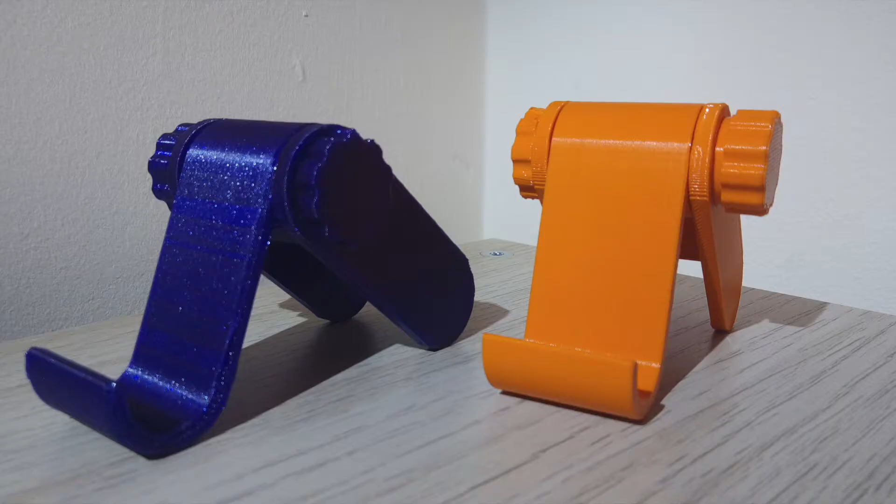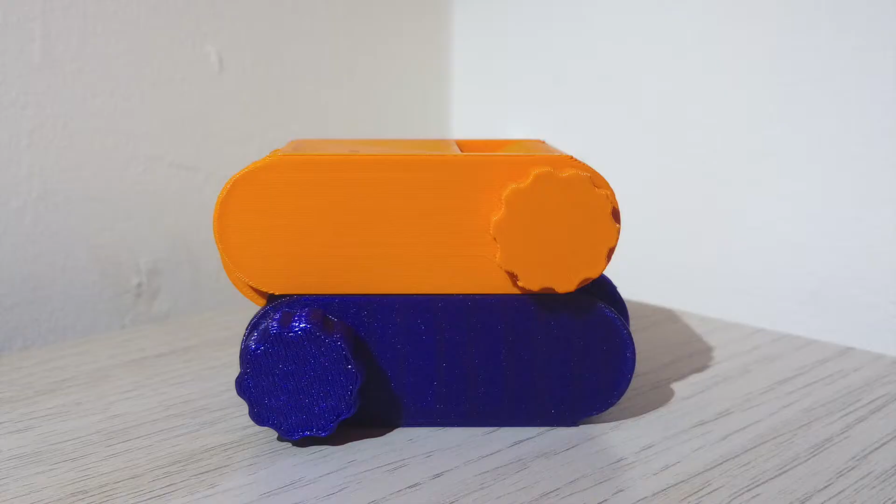So it just so happens that sitting right next to me while I was brainstorming was this. You may have seen one of these before in some previous videos, but it's a standard adjustable collapsible phone stand. When I got this print originally, it came with a tablet stand as well, and it's almost exactly the same thing, just stretched out.

Therefore, if I take the tablet stand and make a few modifications, I could have a stand to keep in the bedroom in general, and a separate way to attach that stand to the front of the drawers, right here. So, with that plan in mind, I jumped into Tinkercad once again.

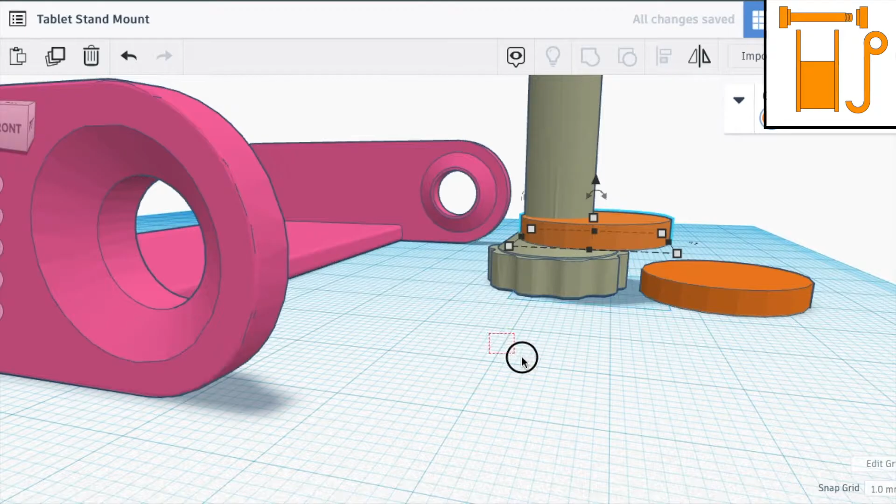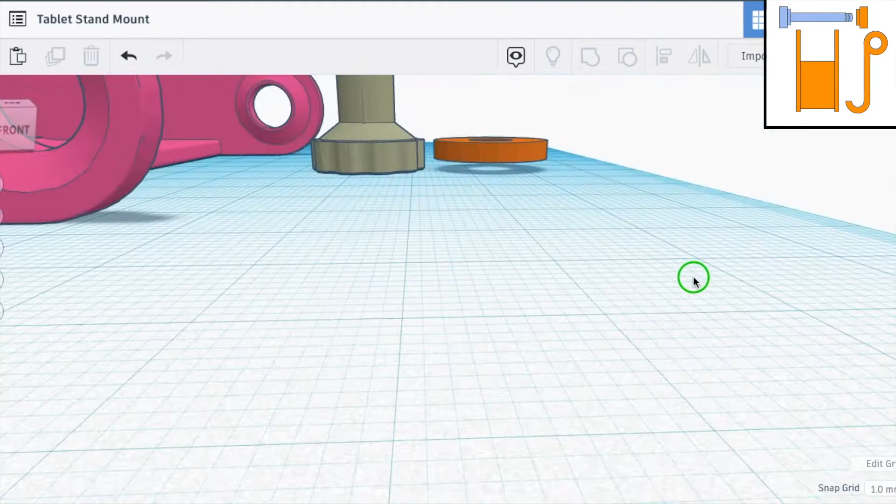These device holders already have things sticking out on both sides, the bolt and nut that make up the pivot of the device. I knew that the bolt would provide the most support for the whole fixture if it was the one holding most of the weight, so I wanted to modify the head of the bolt rather than modifying the nut itself. So I thinned the head of the bolt to hopefully slide into some other mechanism.

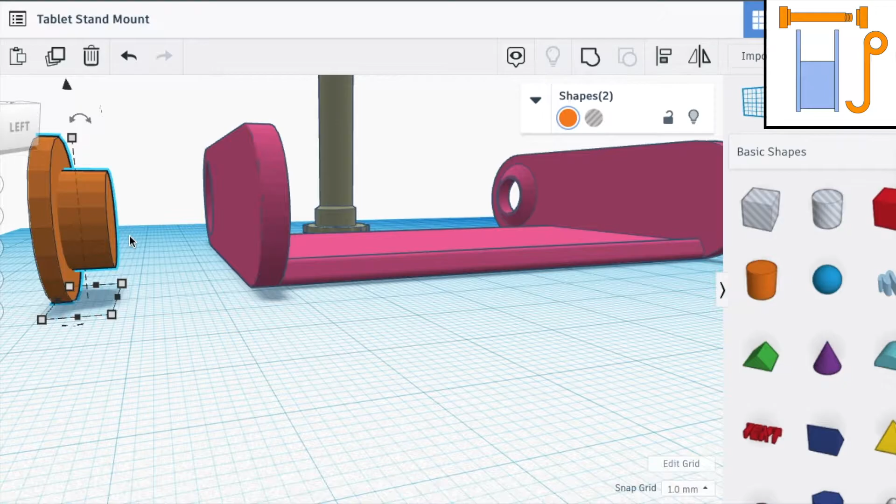But I still needed the bolt to hold the whole thing together, so I need to ensure that I leave some of the thickness. Now that I had a basic idea of the size I wanted the bolt to be at the head, I made a simple copy of that and moved it to the frame of the holder. That way there will be 2 points held by the sliding mechanism, and it'll be a bit more firm and held vertical, with the fine-tuning of the nut available to keep the adjustability of the angle and the whole object.

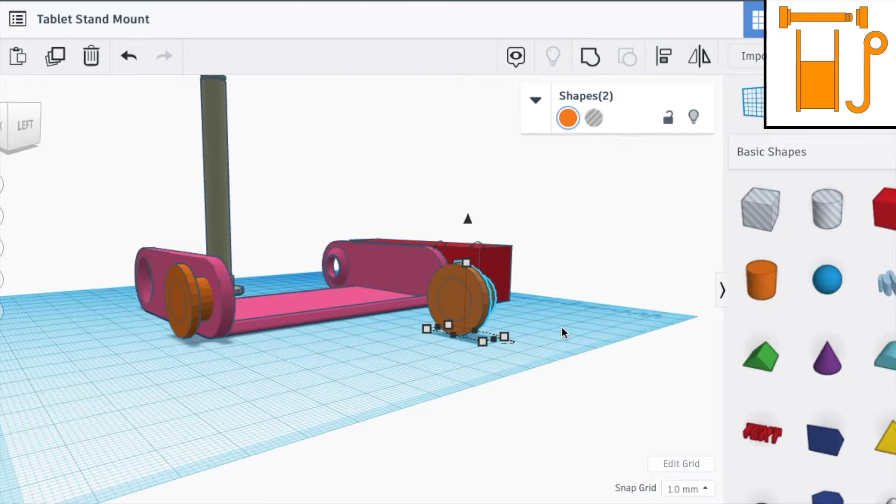When it came to making the sliding mechanism, I knew that I could take that copy of the head of the bolt and just stretch it out to make the void that will become the inside of the slide. After that, I can make a copy of this same piece and just enlarge it slightly to make the outside of that mechanism.

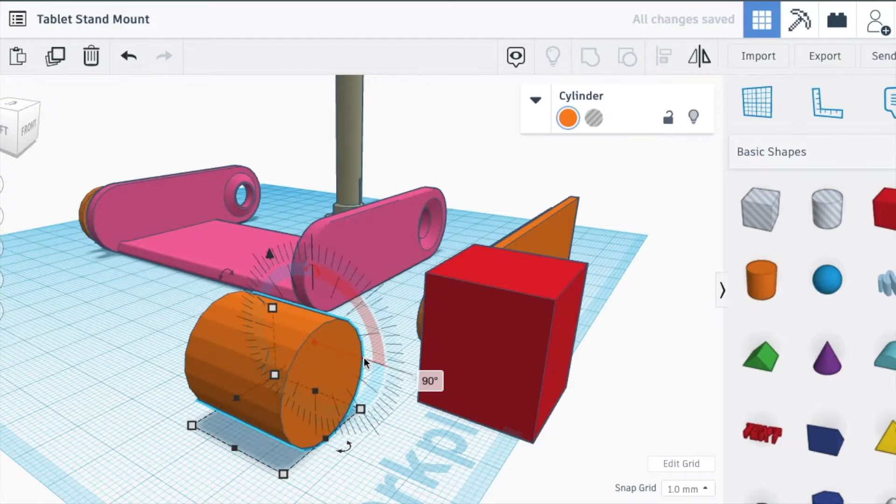But no matter how many times I make something in 3D design, I always seem to forget that if I need something to be, for example, 2 millimeters bigger in the radius, it would then need to be 4 millimeters bigger as a whole, or in its diameter.

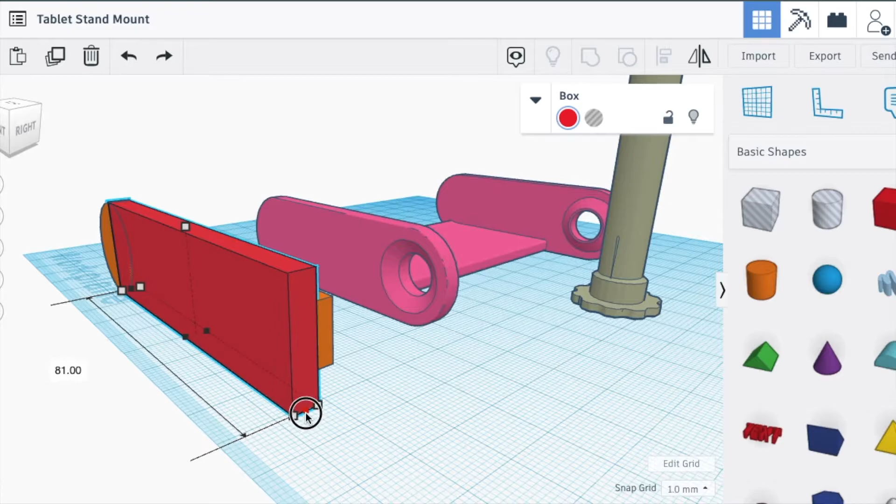But before carving out the planned void, I decided to increase the clearances in the final product by making this void space a millimeter or so bigger in all directions as well. It'll be okay if the thing rattles around a little bit. It shouldn't move too much once the weight of my phone is placed into it.

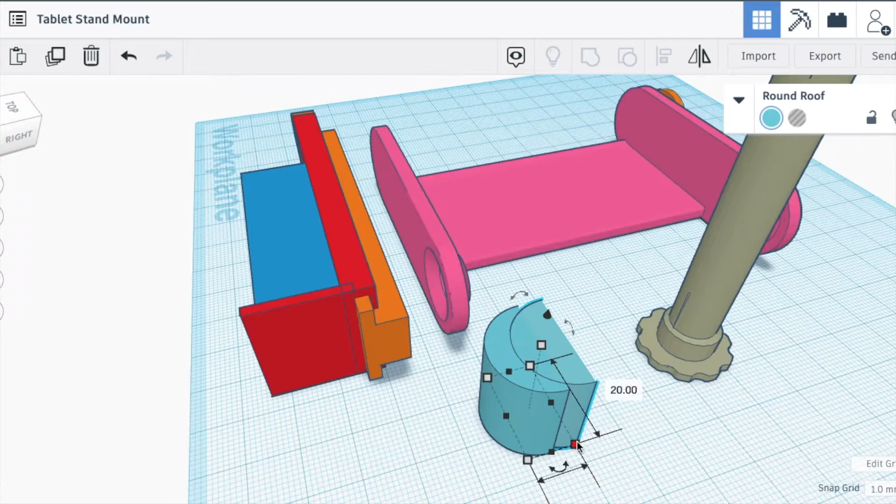And the attachment arm that will be hooked under the drawer, I made it in a similar way to another project I had way back when I first got my printer. I tried to make mounts for a surge protector to the underside of my desk. So I made a few modifications to that previous design and was able to copy the same thing here.

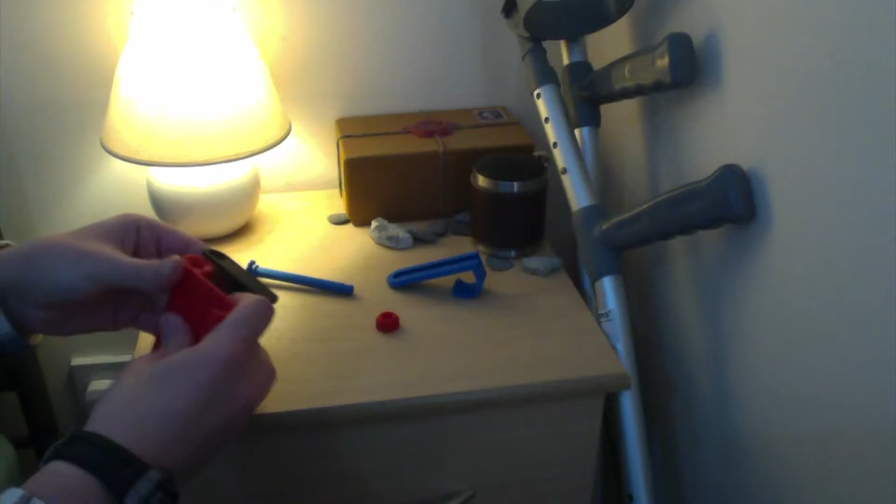I was surprised at how much longer it took to print this version, the tablet holder size, compared to the phone holders. But I suppose it is more than twice as big.

But eventually I had all the pieces printed, and I have to admit that I'm a sucker for the hodgepodge look of using different colored filaments for each piece. But it looks pretty good put together. It still works, but now for the moment of truth.

Does it slot down into this mounting bracket? Actually has a very satisfying snap. It fits pretty solid, and if I need to, I could even kind of loosen this side.

To help the fit be a little looser. Oh, actually that works really well. It'll even fall right out. Or if I don't want it to fall, tighten this up, and it holds nice and firm.

Perfect. Now, even more important, does it fit on the drawer? Perfect. The drawer doesn't shut on its own with it on there, but it doesn't need to.

This I can have angled. And then stick right down on. And now my phone will go here. Or, if it needs to, it can go here.

Perfect. This has been a rather exciting project. It's always thrilling to plan something out in my head, make a digital version, and then see it come into fruition in my hand. But what do you think?